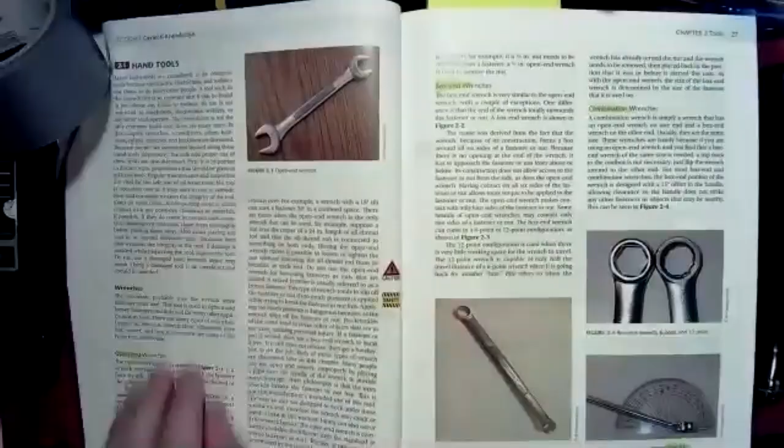Let me move my junk out of the way. Oh, I forgot one other tool which the book doesn't go through.

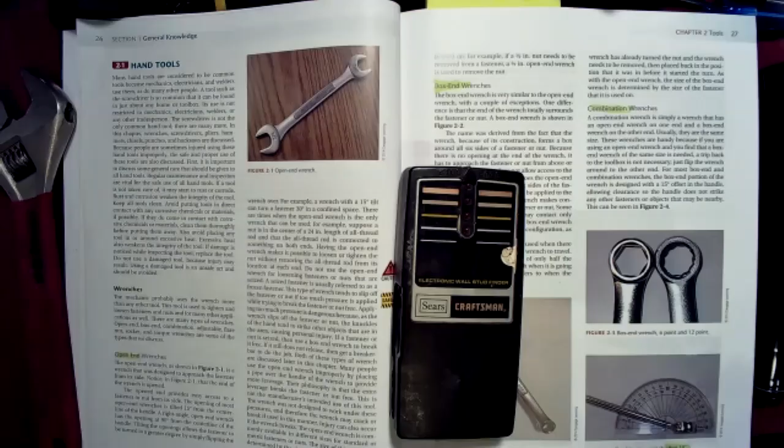Electronic measurement devices - in this case, this is a stud finder. This particular stud finder was purchased from Sears probably before most of you were born, probably in 1978. And it has lasted and done a really good job.

There's a variety of electrical tools like the stud finder - voltage finders and so forth that we're not going to get into in this particular course, including voltmeters, which is a vital tool for all of mechatronics. But you're going to get into that in other courses, so we're not going to touch that here.

All right, so number one, wrenches. If you're a mechanic or doing primarily mechanical work, a wrench is absolutely vital. If you only occasionally do mechanical work, you may not want to invest in your best set of wrenches. I don't invest in my best set because of how rarely I use them.

Both the open-ended wrench - that is a wrench with an open end, here is an open-ended wrench - and a box wrench, that's a wrench with a closed end, like these over here. The only time I find myself using my wrenches regularly is when I'm doing automotive work, and frankly that's only occasionally when I can't get into a spot with a ratchet socket head. So open and box-ended wrenches, from my experience, are not critical to have a good set of right away.

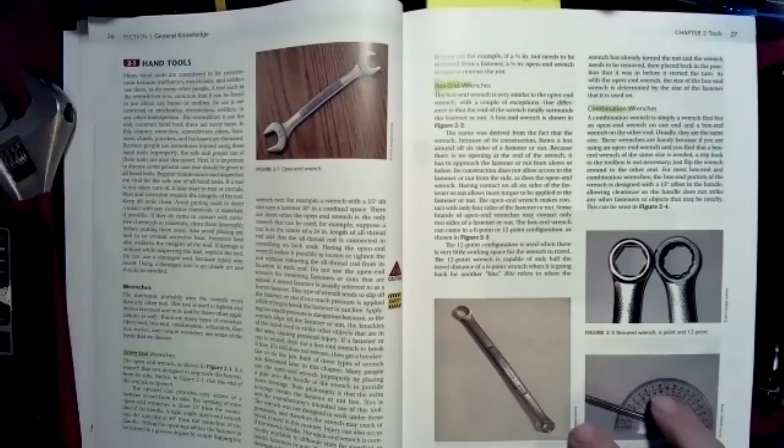Even though I do have a good set, it's not critical to buy right away. You may want to hold off on spending a lot of money on that. Buy yourself a basic set of English and metric and then call it good until you get into your job situation and find out what you need.

The one thing I will mention about wrenches is it's very useful when you're tightening down on a flat surface to have this 15-degree offset. A lot of standard wrenches don't have that - they're flat. This offset will save your knuckles a lot of damage, keeping them off the surface when you're tightening against a big flat surface.

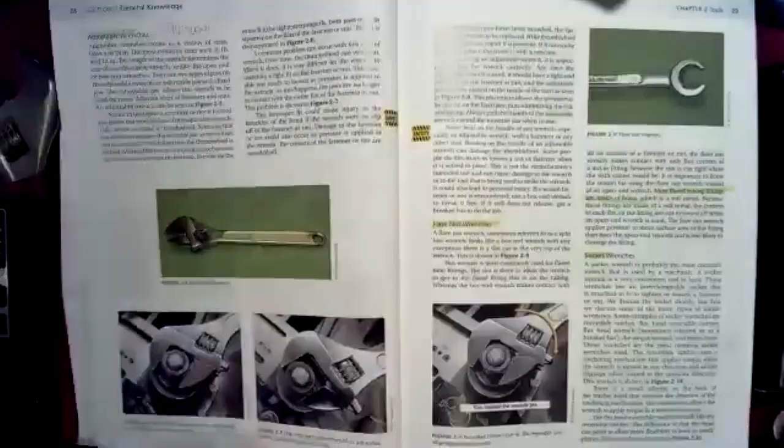Adjustable wrenches are absolutely vital. In fact, having a good quality adjustable wrench in your toolbox is critical. I have found that I like this particular brand - I don't even know, it doesn't even have a brand name on it. It's made in China and comes with these red handles.

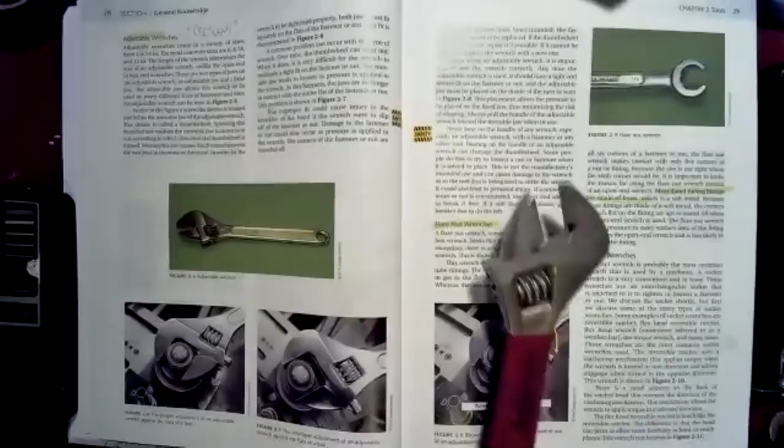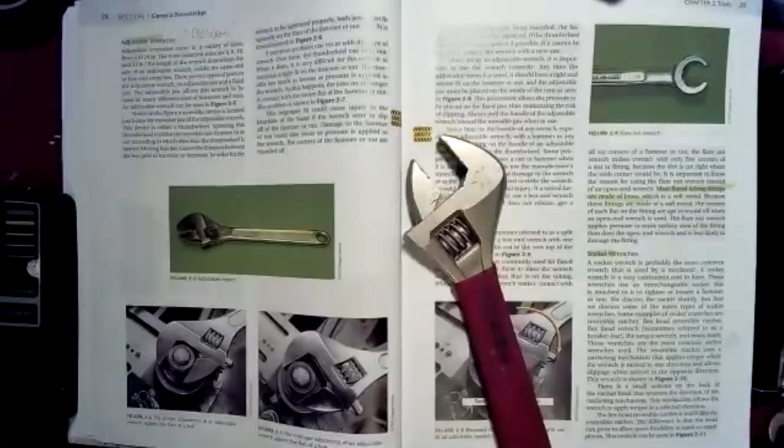I've had this one for years and years, and I've abused it. I've beaten it up, used it as a hammer - you can see by the dents in the side there. I've done everything wrong with this wrench, and it still works well on and on and on.

So we call these crescent wrenches, which is actually a brand name - they're not really all crescent wrenches. That's a brand name of a particular wrench that I don't even think they make anymore. Mostly they're just called adjustable wrenches. Get yourself a good set.

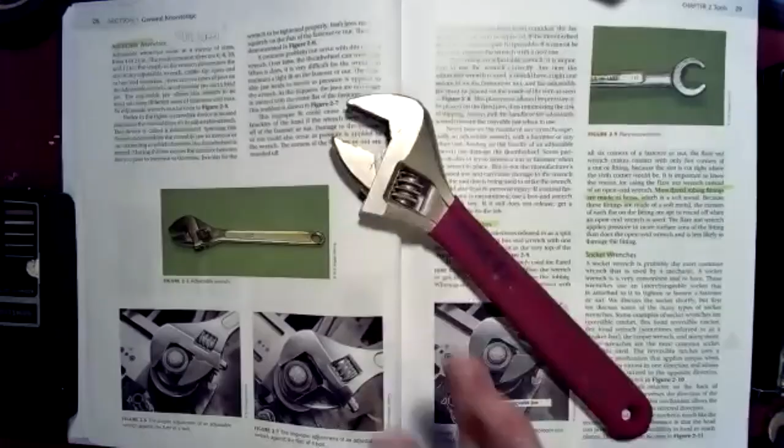I have a small one, a medium and a large one, and a very, very big one. If you're going to put one in your toolkit, I would suggest one with a maximum opening size of about 1 inch and a length of about 9 inches on the handle. This is a really good toolbox size. This one is called Companion brand.

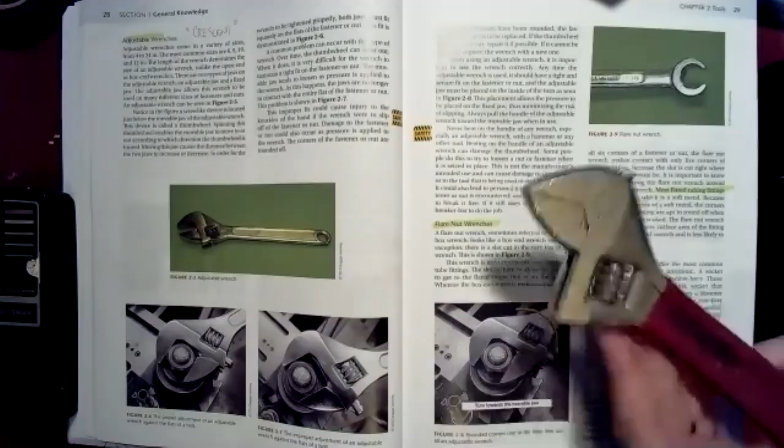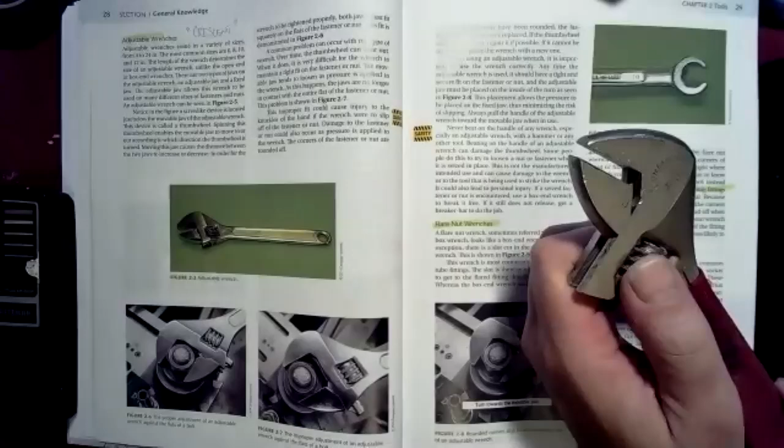So I like this wrench a lot, and I've abused it, and it keeps working well for me. The downside to a crescent wrench is you have to be careful that you adjust it properly every time you tighten down on a nut or bolt. If you let it open a little bit bigger than the nut you're working on, it will potentially damage that nut, and the book takes you through some of that.

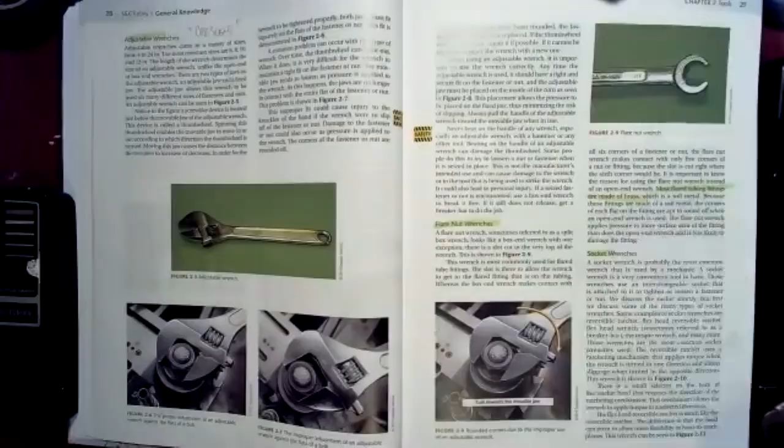Then there's some oddball wrenches - like if you're doing plumbing work, you'll need a flare nut wrench. You can read about that. It's used for brass fittings, which are primarily used in plumbing, both hydraulic as well as water, as well as other things. So read about that in the book.

A good set of socket wrenches is critical. I still have my Craftsman socket wrenches from 20, 30 years ago, and they work great. If you are doing automotive work, extremely high quality socket wrenches are absolutely critical and worth every penny for the best you can buy if you're using them every day.

I don't use my socket wrenches every day. If I'm on the job doing maintenance work, I might use them 2 or 3 times a week. In my current workshop, I might use my socket wrenches 2 or 3 times a month. So I don't need the highest quality anymore, even though my old Craftsman still work pretty well.

You will see that I don't optimize for the absolute highest dollar brands like Snap-on. I think it's useful, if you're using a tool every day, to have a really good quality tool that won't break, but I don't see it as a smart move to buy the most expensive version of a tool.

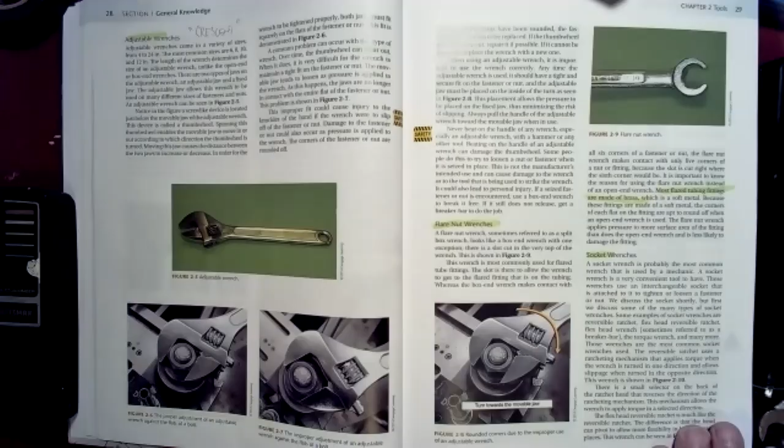A torque wrench. Very often you can get a torque wrench in with your socket wrench sets. A torque wrench is absolutely critical for doing automotive work anymore.

You want to make sure that you don't tighten down your spark plugs any more than their rated torque. Otherwise, you may snap the plug, or you may get it so tight down in the hole that you can't get it out again if you ever need to change it. So getting the spark plug in right with the torque wrench is absolutely critical.

Virtually any part on an engine and many, many other parts in your vehicle are going to be rated to be tightened down to a certain torque. So that lets you set the tightness to a particular torque value. A lot of equipment now you buy, if you do any repair on it, you have to certify that you maintain the right torque.

So this is not critical. This is in the third category where it's not critical. You don't always need it, but if you're doing mechanical work on vehicles or in any kind of certified machinery, you will need this for your workplace.

I wouldn't suggest you buy a torque wrench right up front. I would wait until you see if you really need it in your workplace. And to be honest, I currently don't have a torque wrench. I went looking for one the other day. I couldn't find it, so I'm planning to go replace my torque wrench, and I just haven't done that yet.

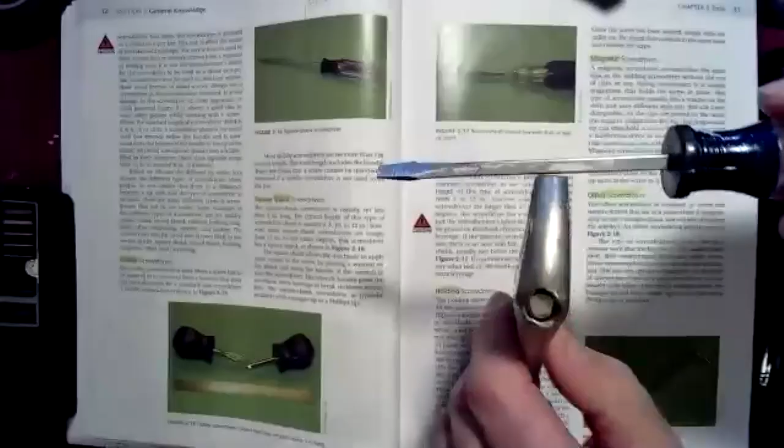Square shank screwdrivers means that you've got a square profile to the shank, which is the shaft of the screwdriver. That means I can put a wrench on that shaft and I can get a lot of torque on that screwdriver. Now, that's also how I can screw up the tip.

As you can see, this tip has just got a slight twist to it. It's not twisted enough that I can take it back to, I guess Lowe's is doing Craftsman now, and replace it, but it's just got a slight twist to it, which means that I torqued the snot out of this screwdriver at some point in its life.

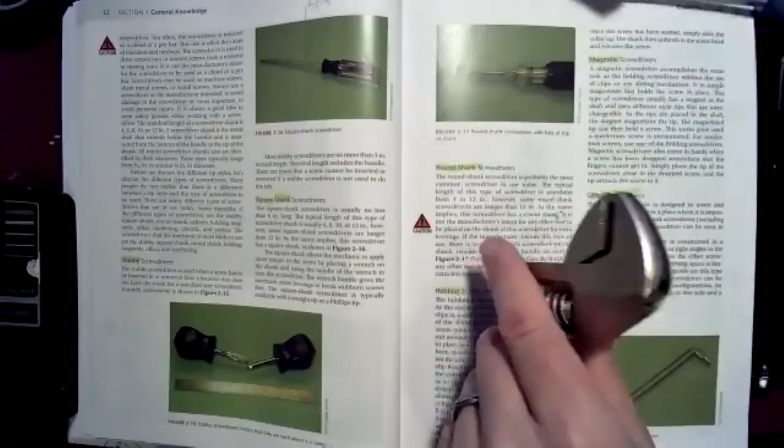These particular screwdrivers are absolutely vital for the mechatronics world, and this one too. Having a really good, high quality, hardened steel, number 2 Phillips, round or square shank—in this case Phillips are almost always round shank.

Is absolutely vital. Many, many pieces of equipment have this particular Phillips head drive, that star looking slot, as absolutely vital.

Another thing you need is a tiny flathead screwdriver. Notice this flathead screwdriver has got a very narrow profile. That is used to work on terminal blocks.

And having a very high quality Phillips head in that same size range as well. Very, very important. These are all very, very important to have.

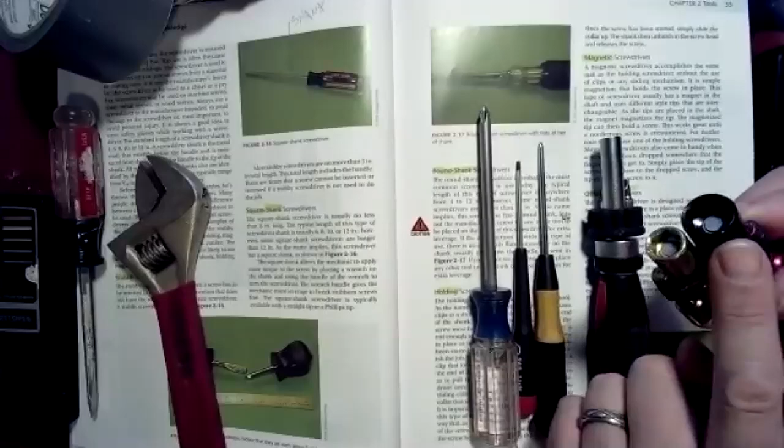Or if you're putting it in, you can pop that screw or nut into the socket and then install it. So that is very, very important from a screwdriver perspective.